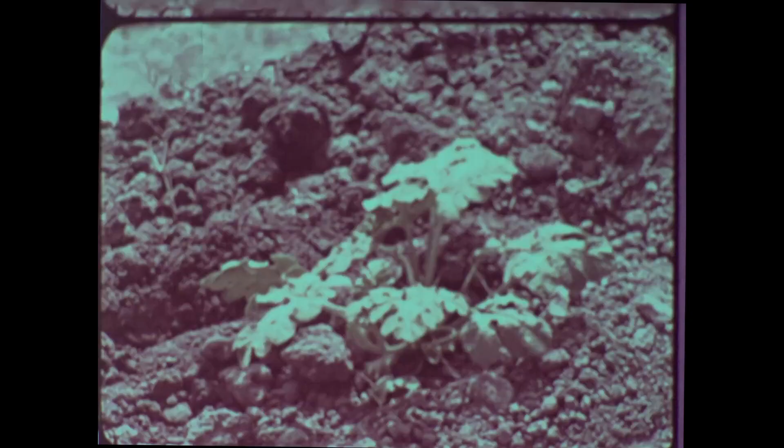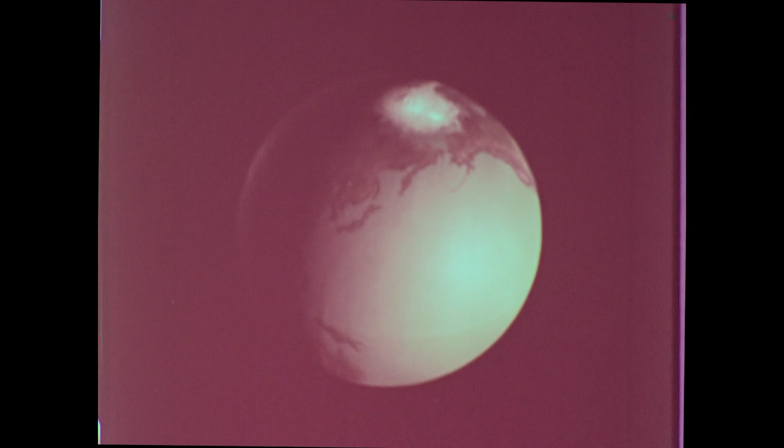Of all the water on Earth, more than 97% is in the ocean, not fit to drink, and too salty for irrigation. 2% of the Earth's water is frozen and useless in glaciers and ice caps. The remaining 1% is usable, but not utilized properly or distributed evenly.

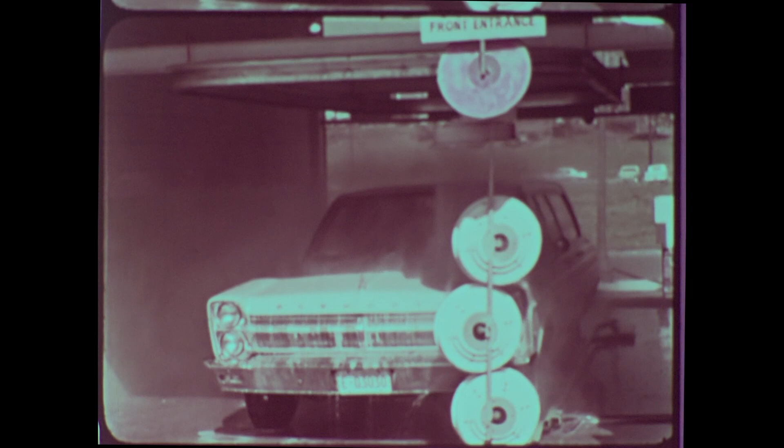Within 20 years, the world's demand for water will double. Americans, who now use more than 350 billion gallons each day, will require 600 billion gallons daily in 15 to 20 years, and 1 trillion gallons or more by the end of this century.

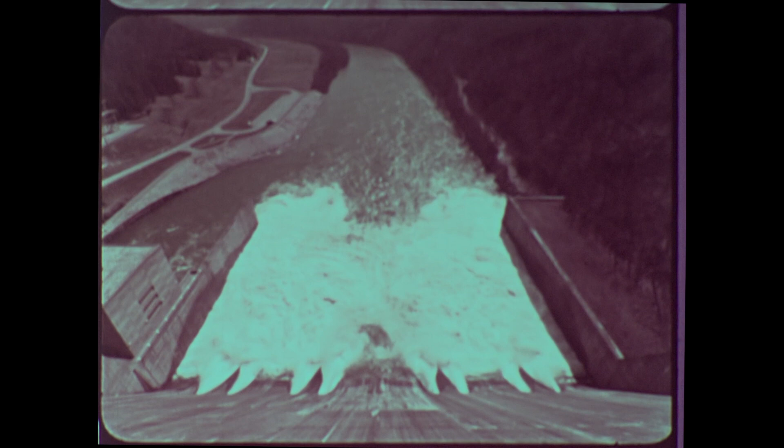What is the solution to the water shortage problem which plagues the world? There is no single answer, but several steps can be taken to reduce the shortage. These include more efficient use of water in agriculture, better water storage and distribution systems, and the control of water pollution and wastage.

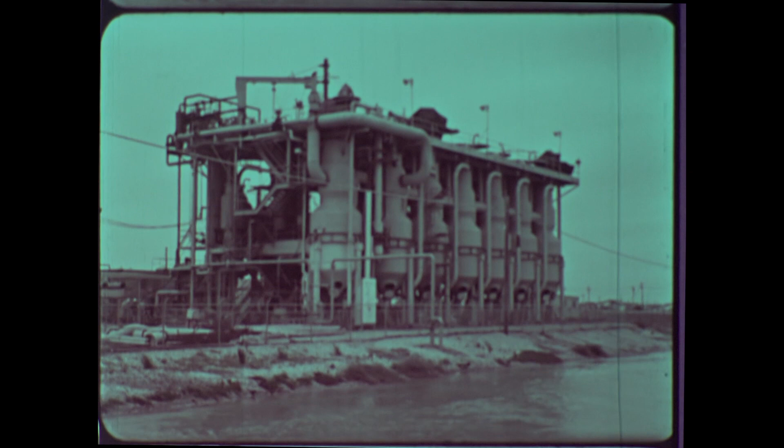In many areas, the most economical step lies in desalting the seas. Desalting is one of the oldest methods of obtaining fresh water. It was used on a small scale even in ancient Greece. The emphasis today, however, is on desalting large amounts of seawater at the lowest cost possible.

There are several ways to separate the water and salt in seawater. This may be done by freezing it, which is also known as the crystallization process, by squeezing it through special membranes, and by boiling it, better known as the distillation process.

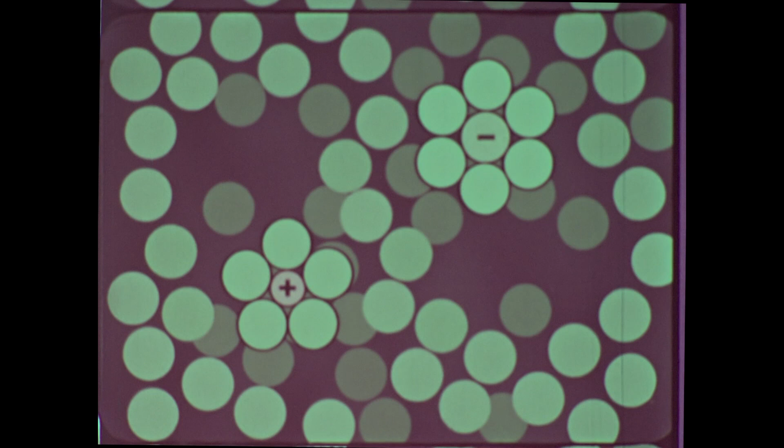The principal impurity of seawater is common salt, sodium chloride. In each salt crystal, there are equal parts of sodium ions and chloride ions. As the salt is dissolved in water, the ions are freed to migrate among the water molecules. Each ion carries an electric charge, which attracts a layer of water molecules. The water surrounds the ion like a cover, and both move about together.

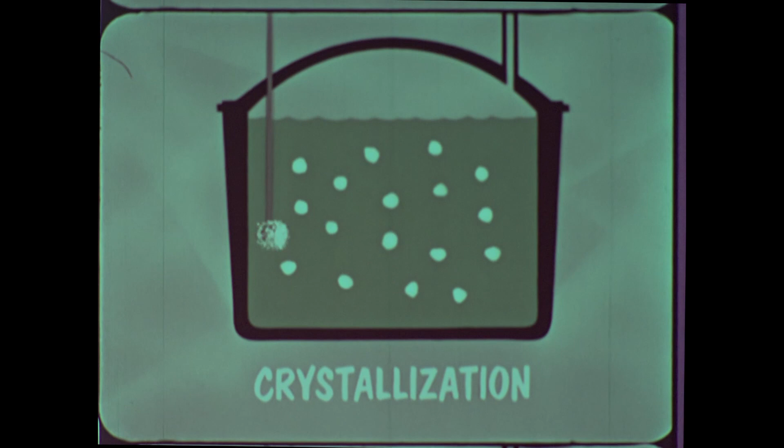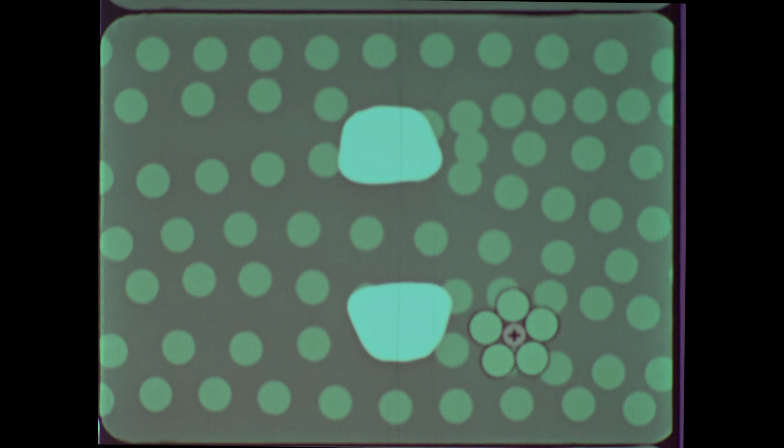The problem in desalting is to separate the water from the salt. In the crystallization process, part of the seawater is frozen when it is cooled by evaporation under vacuum. The water molecules in freezing form into ice crystals, while the salt remains in the liquid. The ice crystals are then removed, rinsed, and melted to make fresh water.

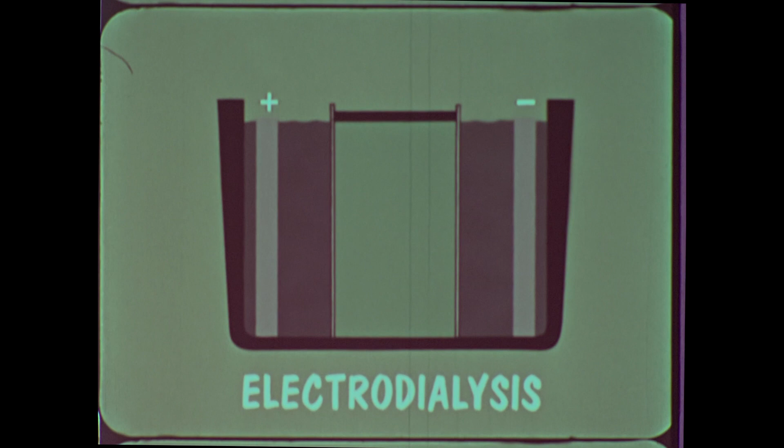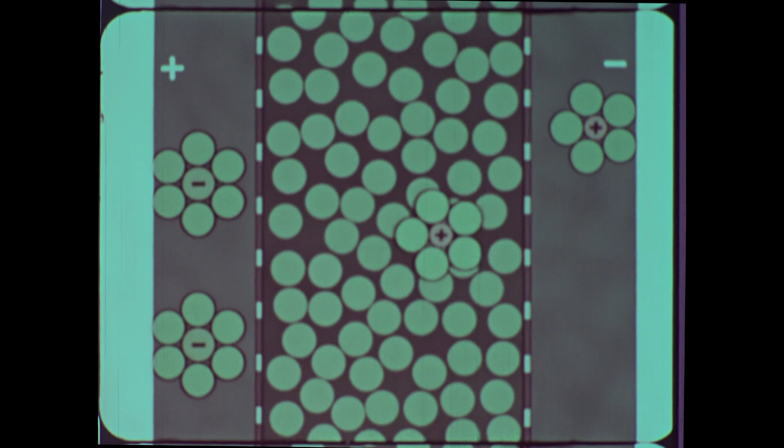In the squeezing or membrane process, some types of membranes permit water to pass through them more easily than the salt. This is known as the reverse osmosis method. The electrodialysis method uses two membranes to separate the salt and water. Positive and negative electrodes are also utilized. When an electric current is applied, the negative ions pass through one of the membranes, while the positive ions travel through the other, thereby leaving the fresh water behind.

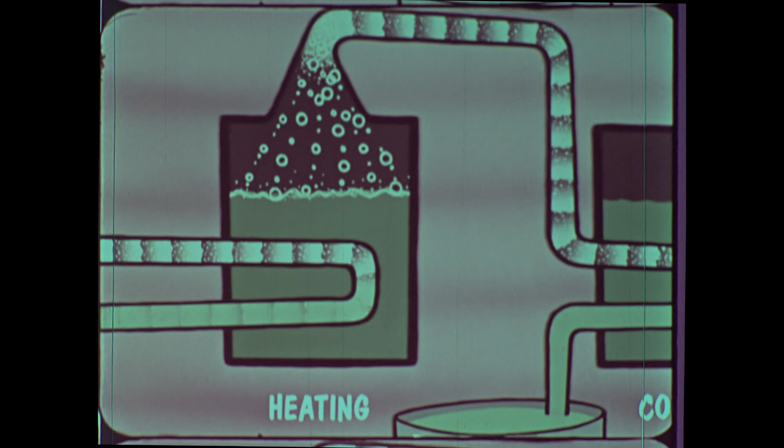In the distillation process, the seawater is boiled. The water molecules turn into steam, which is then condensed to form pure water. The salt is left behind. This distillation process appears to be the cheapest at present for large-scale applications.

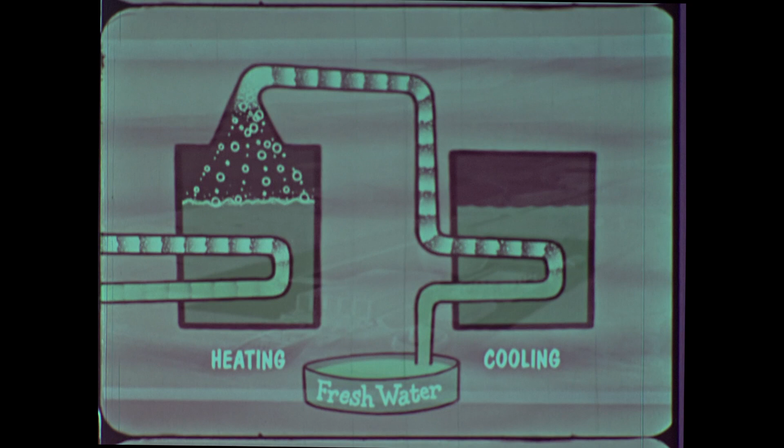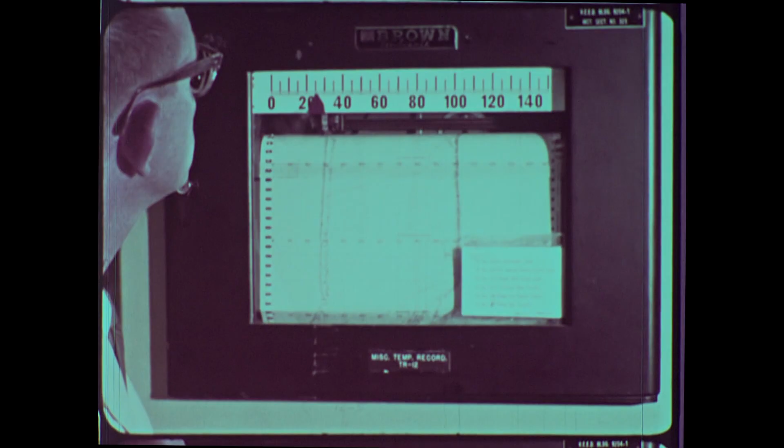The problem with desalting plants is not in making them work, but in building them at low cost and in reducing their cost of operation. Extensive research is being conducted in the United States and abroad to find ways of reducing the cost of desalting seawater.

Included are studies of desalting facilities powered by nuclear energy, since this form of energy may be the cheapest, especially for large-scale applications. The U.S. Atomic Energy Commission and the Department of Interior, jointly, are conducting research on the use of large-scale nuclear desalting plants. Such large plants would not only desalt seawater, but could also provide simultaneously low-cost electrical power for homes and industry.

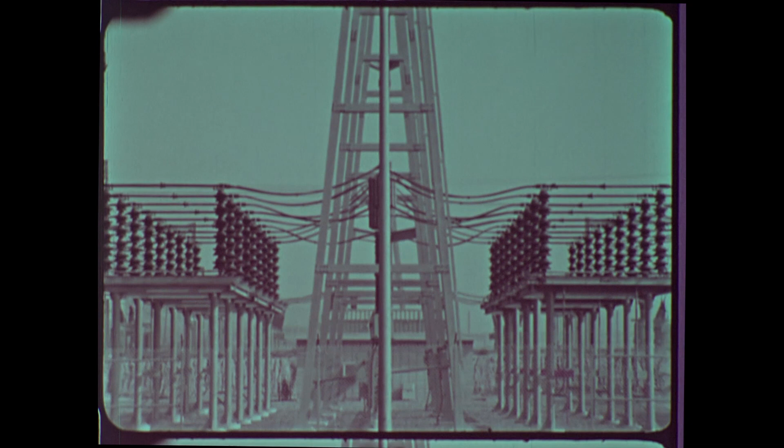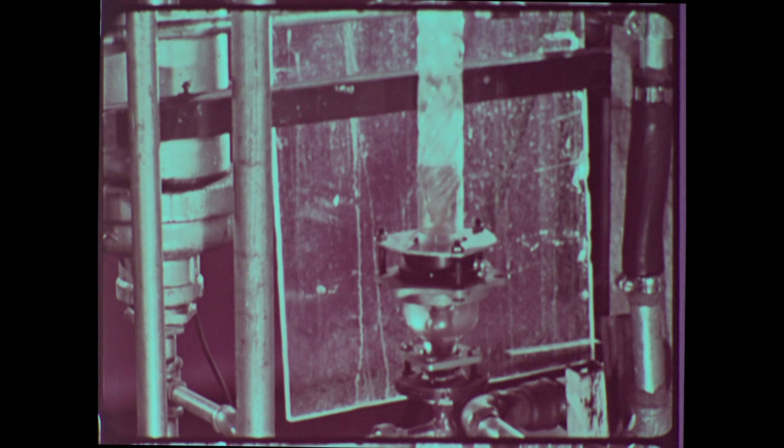At AEC's Oak Ridge National Laboratory, various concepts of reactor-powered desalting systems are being explored, including research on the development of huge evaporators. These programs are aimed at reducing the cost of desalting large quantities of water. One of the major cost factors involves the evaporator, the equipment in which salt water is converted into steam.

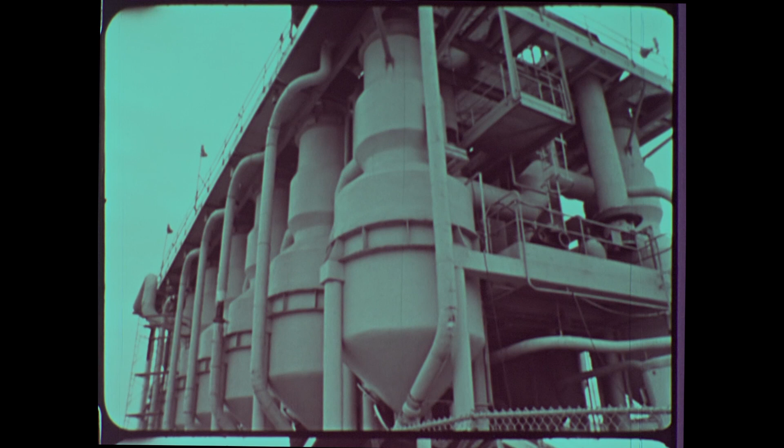With a single evaporator, the heat used to make the steam is utilized only once. Actually, evaporators are built in series so that the initial input of heat can be reused many times, and each time additional quantities of water are distilled.

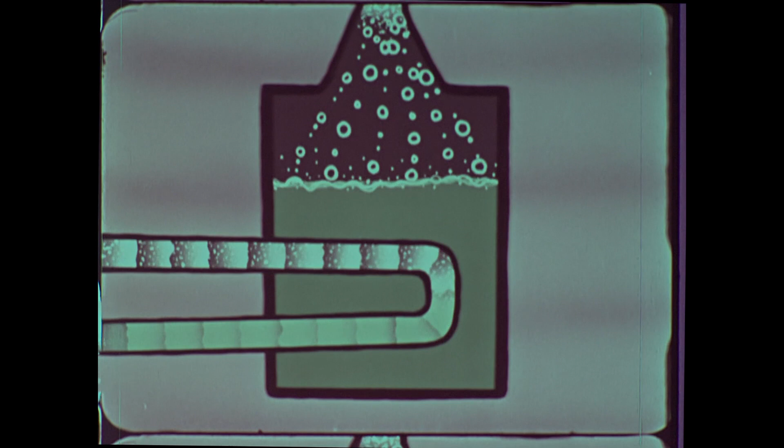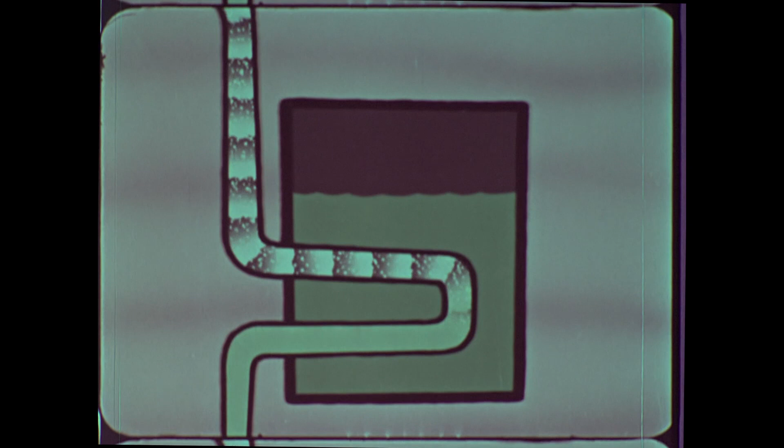For instance, energy from a boiler or a reactor is used to heat seawater, which boils in the first vessel to produce steam. This steam is pure water vapor. When it is cooled slightly, it condenses to form distilled water. In doing so, it releases almost its original amount of heat. This heat then can be used to produce steam in the second vessel or stage of the evaporator system.

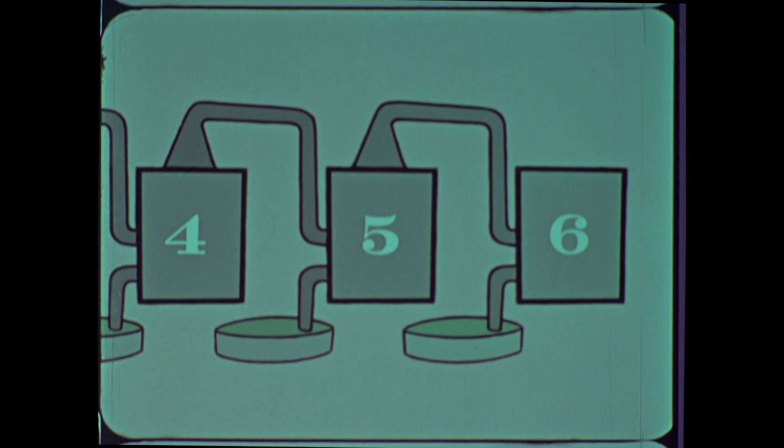The sequence can be repeated many times, each time at a slightly lower temperature and pressure until the temperature of the steam is too low for further use. From an economic standpoint, this is the result. With a one-stage evaporator, the heat cost is high and the cost of equipment is low.

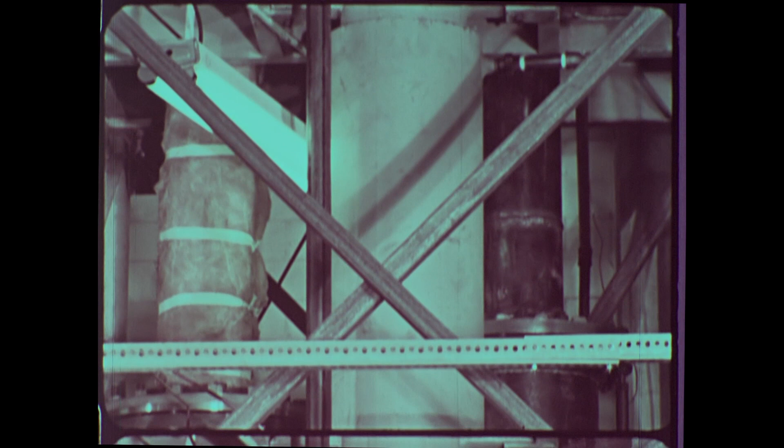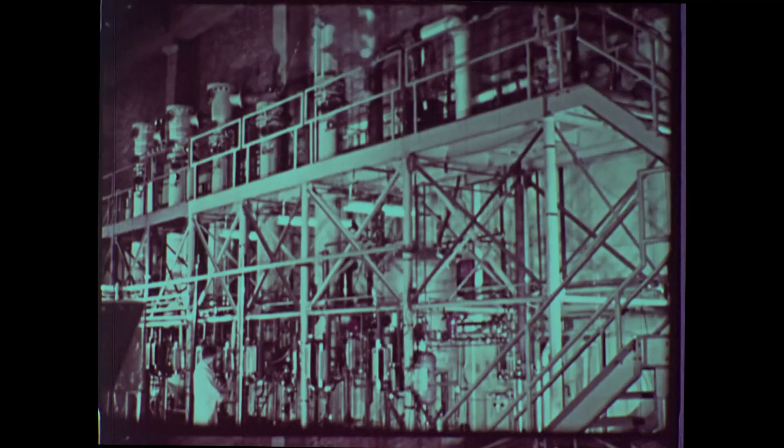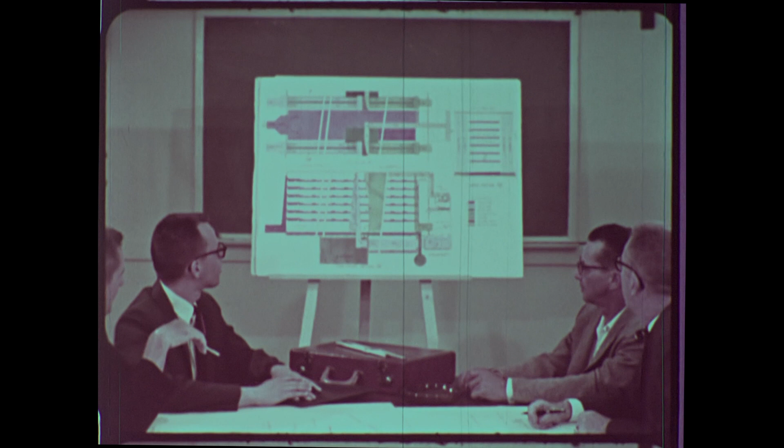With two stages of evaporators, the heat cost drops to nearly one-half, although the equipment costs more. Additional stages will raise the equipment cost, but also reduce the heat cost progressively. As a result, the designer seeks to balance heat and equipment costs so that water can be produced at minimum cost. Thus, the designer must consider the cost of each stage of evaporation and the cost of the heat initially

supplied to the evaporator to achieve the most favorable plant design. One method of reducing the cost of an evaporator stage is to use more advanced heat transfer techniques, thereby reducing the size and cost of the equipment.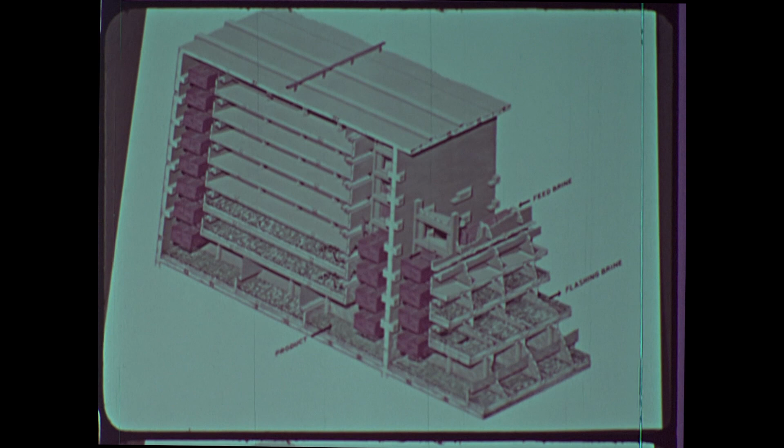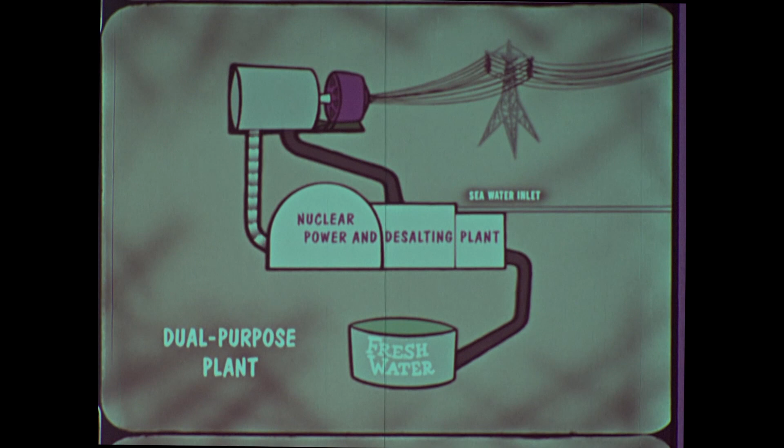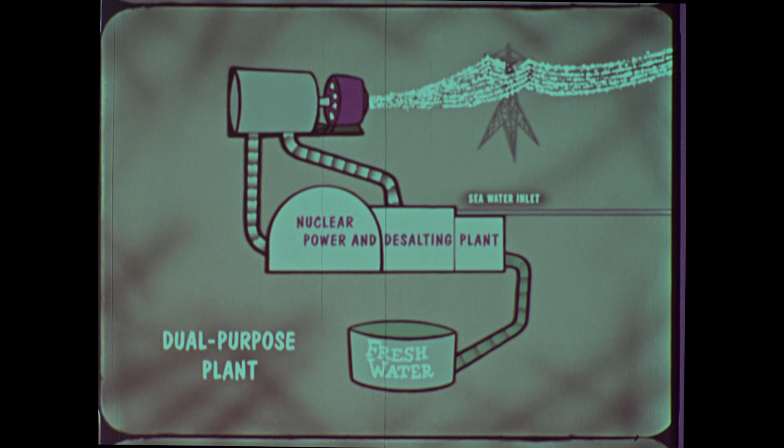Another cost-cutting approach involves the use of very large units, since many economies are possible in large-scale construction. Still another way to reduce costs is to use dual-purpose nuclear plants. In such plants, the reactor would generate steam, which would then operate the turbogenerators to produce electricity and subsequently provide the energy for the desalting plant. With this concept, the production of electric power, along with the desalting of seawater, offers cost advantages to both products.

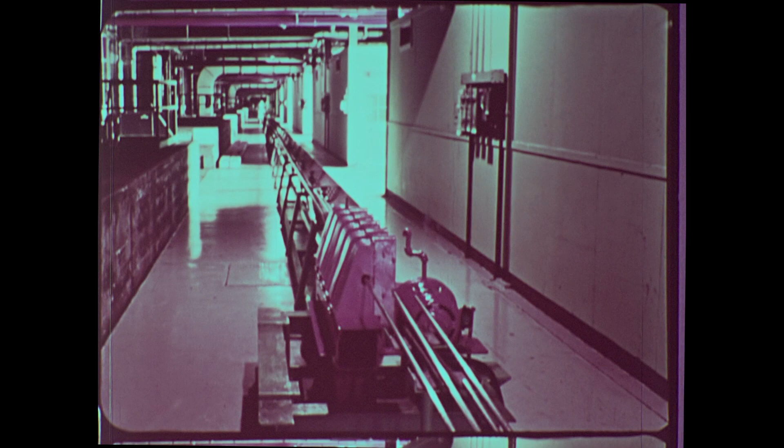The use of large-scale dual-purpose plants calls for a major scale-up of the reactor heat source. Such reactors may be many times larger than those in use today. The scale-up of reactors and other components, as well as finding improved methods of construction and operation, are the principal technical problems. And only through the construction and operation of larger plants can needed operating and economic data be obtained.

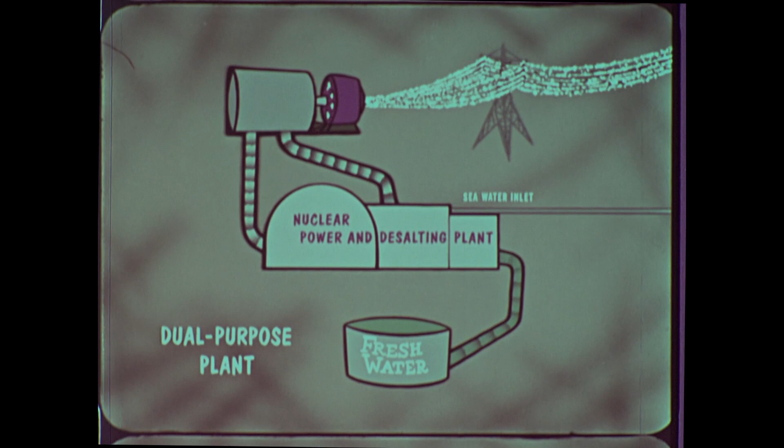Studies show that several advantages may be realized by using large reactors in dual-purpose plants. For instance, reduced electrical costs would benefit industrial, commercial, and residential consumers. Another attractive feature is that nuclear plant economics do not vary greatly because of geographic location. This would be a boon to those areas where industrial development has been retarded because they are not convenient to conventional fuel sources.

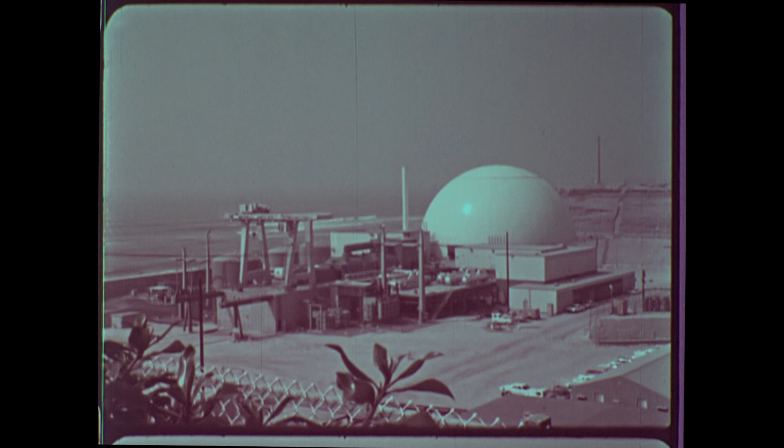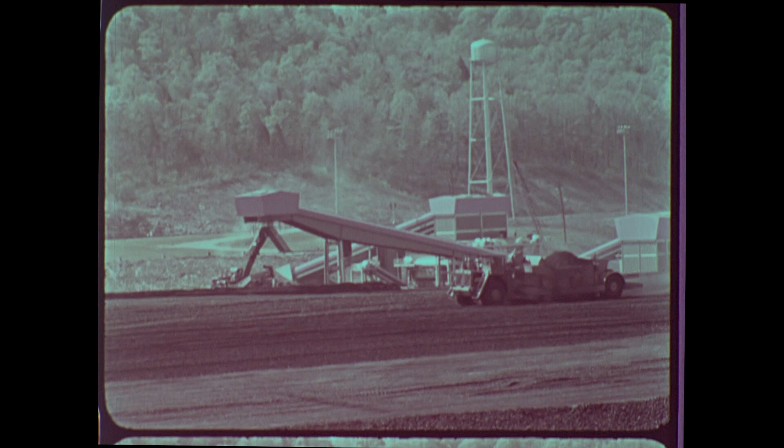Because of its compact nature, nuclear energy is ideally suited to situations where logistics are difficult, since nuclear plants do not require extensive fuel storage or transportation facilities like conventional power plants. The smoke and smog problem, too, is practically eliminated with nuclear energy facilities.

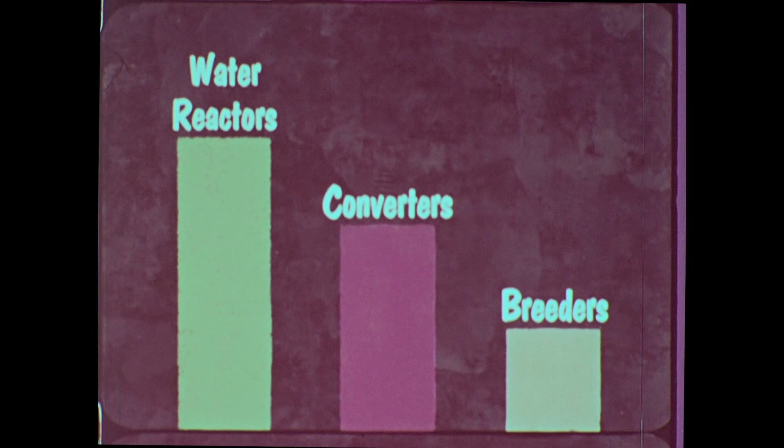Nuclear fuel costs are expected to decrease as fuel technology is improved and a larger fueling industry is established, and as more advanced reactor concepts are developed.

The rapidly rising rate of the world's population is not only increasing the demand for water, but is also creating famine conditions in various parts of the earth. Current food shortages point to the spread of famine. By 1980, it is predicted that unless something is done to increase food supplies, famine will spread throughout portions of Asia, Africa, and South America.

Additional water may be a key solution to this problem. Most people are not aware of the large amounts of water required for growing their food supplies. Although 100 or more gallons daily per person is common for domestic and industrial needs in the United States, another 4,000 gallons daily for each person is consumed in growing his food supply. A minimum diet requires at least 2,000 gallons daily for growing food with present agricultural methods.

The development of large nuclear desalting plants, which could supply fresh water for household and industrial uses as well as for agriculture, may be mandatory to eliminate famine. To meet this threat, many nations, including the United States, have announced desalting as a national goal. Of the total land area in the world today, only about 11% is now being used in raising the world's food supply.

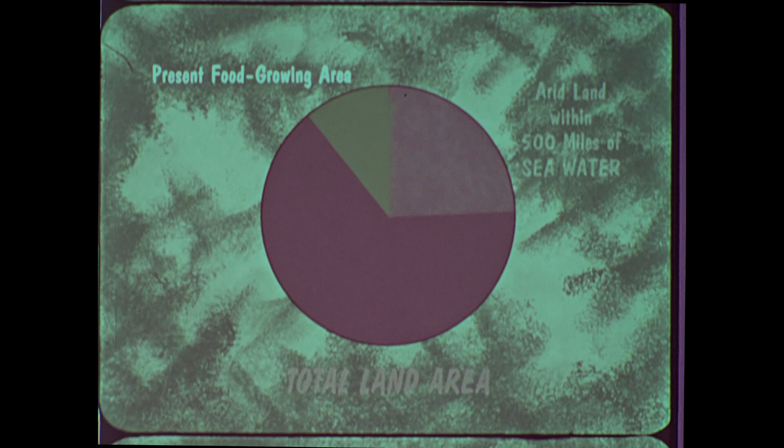There is much arid, dry, but fertile land lying idle throughout the world, several times the total area now being used for growing food. Nuclear desalting may make it possible for man to settle in new areas where he can live and raise his own food.

Many desalting facilities are in use today, and large nuclear desalting plants are being studied or planned for California, Mexico, Israel, and the Soviet Union. The President of the United States has promised full cooperation with other nations in developing desalting technology.

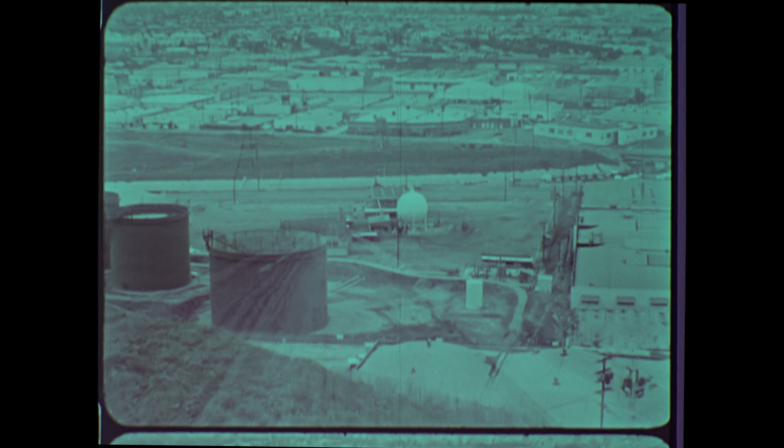In a recent message, he said, "The time is coming when a single desalting plant, powered by nuclear energy, will produce hundreds of millions of gallons of fresh water and large amounts of electricity every day. Such a plant can foreseeably provide water to industries and thirsty cities at prices they can afford, and may eventually benefit agriculture as well. Our government is proceeding with an aggressive program of nuclear desalting.

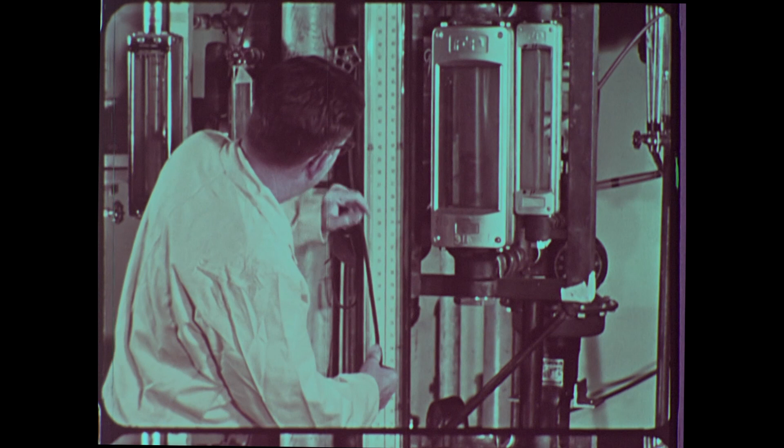We invite all countries to join with us in this effort. What we learn from this program will be shared with the world."

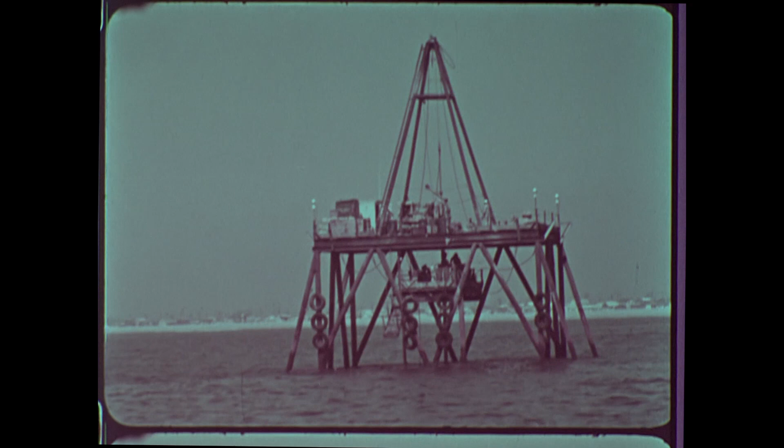Already, a major water supply agency and 3 utilities are moving toward joint construction of a large dual-purpose nuclear-powered desalting project in Southern California. The government is participating in the development of technology for this project, which is expected to be in operation in the early 1970s. It will supply 150 million gallons of water daily and have a gross output of 1,800 megawatts.

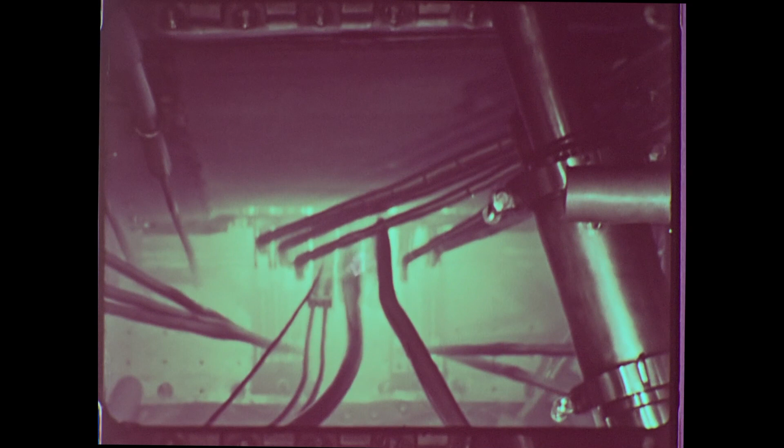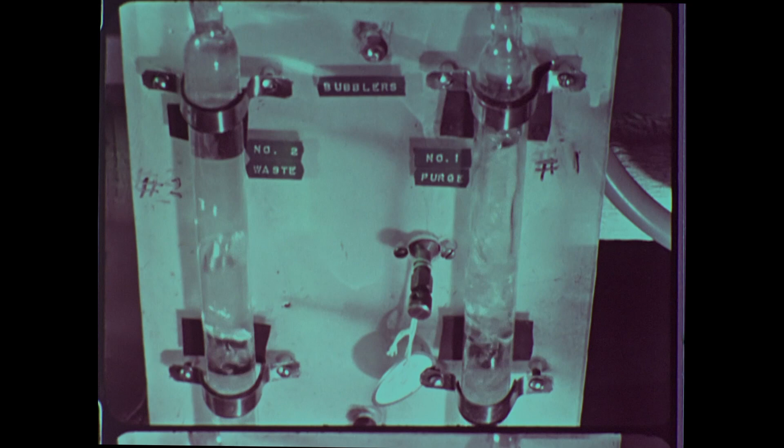Thus, the coupling of two emerging technologies, nuclear energy and desalting, can provide immeasurable benefits in the years ahead. This is one of today's most challenging areas of research and development, and one which holds great promise for answering the needs of future generations. Through the peaceful use of nuclear energy in desalting the seas, human suffering may be alleviated throughout the world.